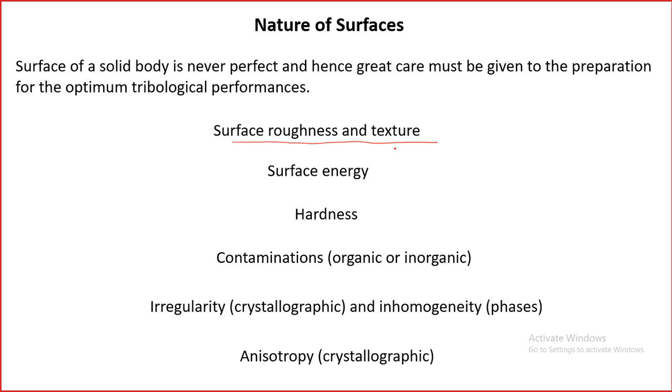The very first one that we have to understand is about surface roughness and texture. So this is what we were doing last time. So for definition, surface texture is the repetitive or random deviation from the nominal surface that forms the three-dimensional topography of the surface. So texture includes many things. It is repetitive, or it can be random deviation from the nominal surfaces.

So a normal surface, you expect to be a smooth surface, or whatever roughness you are expecting, but in general you will get a surface which is not what you expected. It has got different features on the surface, then it is called texture. So texture is not just one parameter. And here in the texture, the very first thing is the roughness, whether it is nano scale or micro scale. So both are important depending upon the engineering application or tribology.

So as I was saying last time, in some cases even angstrom level roughness is very critical, and the example is magnetic hard disks. For magnetic hard disks, the roughness of the disk is in the range of few angstroms, only few angstroms. So that means atomically smooth surface.

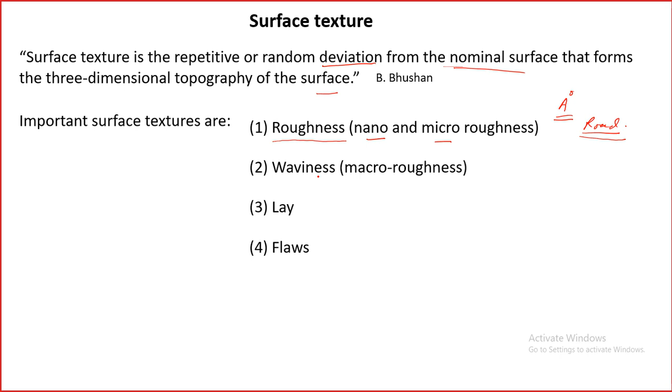Another type of roughness related parameter is called waviness. So waviness is not exactly roughness, but you can call it macro scale roughness. So when we see that the profile of the surface changes in a very repetitive manner, like a wave, then we call it waviness or macro roughness.

Another important part is the lay. Lay is basically the direction of predominant surface pattern. So if a surface has been manufactured in such a way that it gives this kind of feature, whether it is some sort of roughness or some waviness, and this feature extends in one particular direction, then it is called lay, and this is the direction of lay. This is generally produced by most of the engineering processes like turning, machining. They all have this kind of lays.

Then the fourth one is flaws. Flaws are basically some irregularities in the surface. So for example, there can be some scratch or some depression, some pit formation. So these will be the flaws of the surface. So all together we call them surface texture.

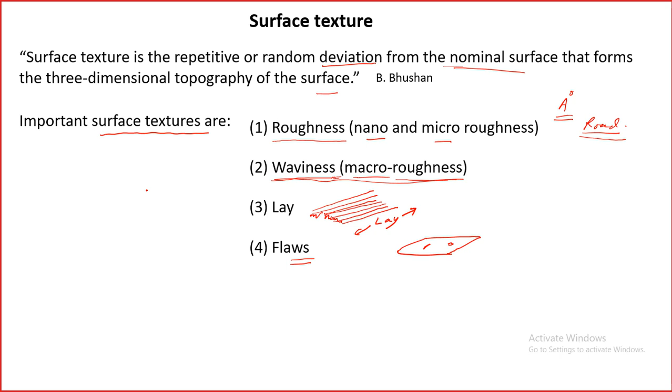So we will go through some of the terminology and parameters that are used for surface texturing. It is not always possible to well define a surface texture, but different statistical parameters have been proposed and used for this purpose. So here is a pictorial display of surface texture.

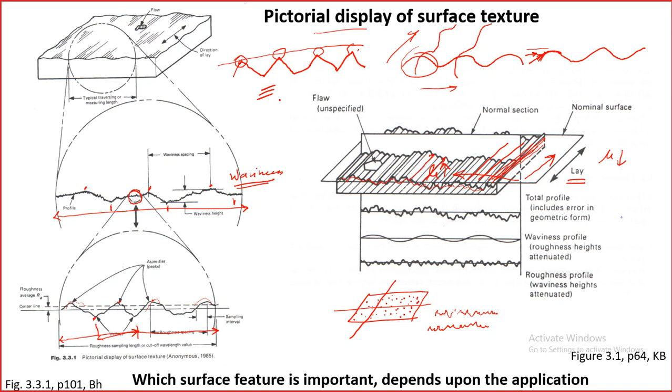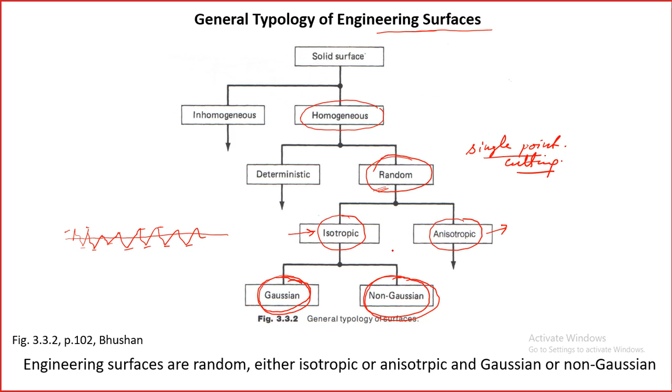And it's basically because of the way surfaces are produced. So for example, single point cutting process will produce anisotropic type of surface, whereas sandblasting or even casting may produce isotropic surface. So depending upon what kind of engineering process we follow for the manufacturing, we will have one of these types of surfaces. Effect of the scales of the vertical height and horizontal spacing features. So now, whenever you look at the surface profiles, often you will see this type.

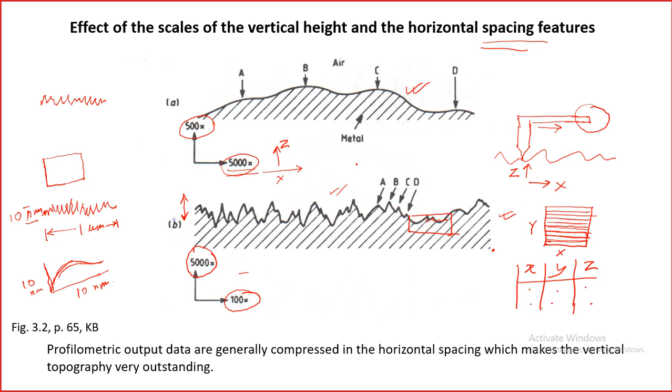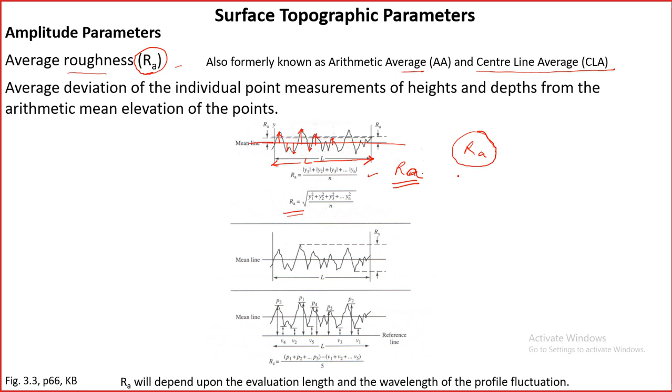A more formal way of writing Ra is like this: within the sampling length, Z and dx. For example, if the profile is like this and you have got a mean line, for each Z and dx you can sum them all together divided by the total length. All the dx put together will be L. So in the integration this becomes L and L gets cancelled out, so finally it is the Z that is important. This is another way of defining Ra, and in this definition we are considering the area rather than the heights.

So now if you look at these two 2D profiles, this is a gentler sinusoidal type of profile, and this one has a more spiky nature. But both of these surfaces have the same Ra: Ra is 0.64 A, where A is this dimension. But do you think these two surfaces are the same? No, sir, they are different. They are different. In our tribological application, what do you think they will have in terms of tribological performance?

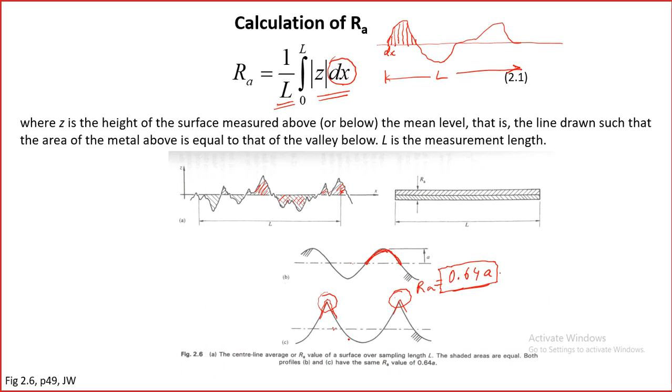So that's why there are some other parameters which have been used. Another one is called RQ, or root mean square, which is defined by this. Basically it has been squared here and then under root. This gives a better picture of the surface, but RQ also has a similar kind of issue as RA. In many cases you will have RQ reported, in some cases you will have only RA reported.

For some, this ratio of RQ to RA is often given, and it is said that for a sine wave type of surface profile this is 1.11. For some other kinds of surfaces, for example the Gaussian distribution we were talking about, it is 1.25. So these numbers have been calculated and given, but the important thing is: can RA give us a complete picture of the surface as far as tribology is concerned, or can RQ give us the complete picture? So those are the facts.

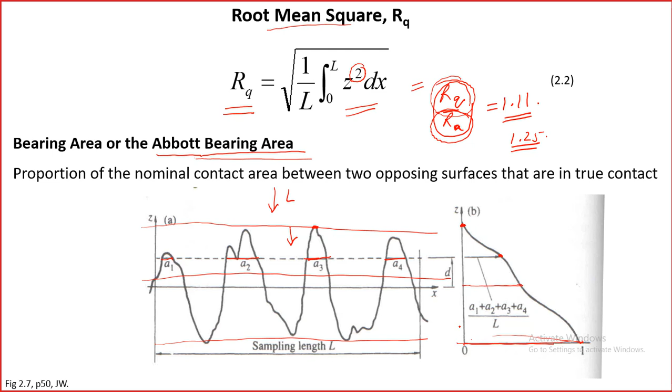As we go down, we have more contact area, more contact surfaces, and at some point complete touch. So this is known as the bearing area, how much of the area is bearing the load if you apply the load from here. At this point only a little bit, and at this point all the surfaces are being borne by the other surface. So this is another way of defining the bearing area concept. Again, this is not so much used, but perhaps it will be useful in contact stress calculation.